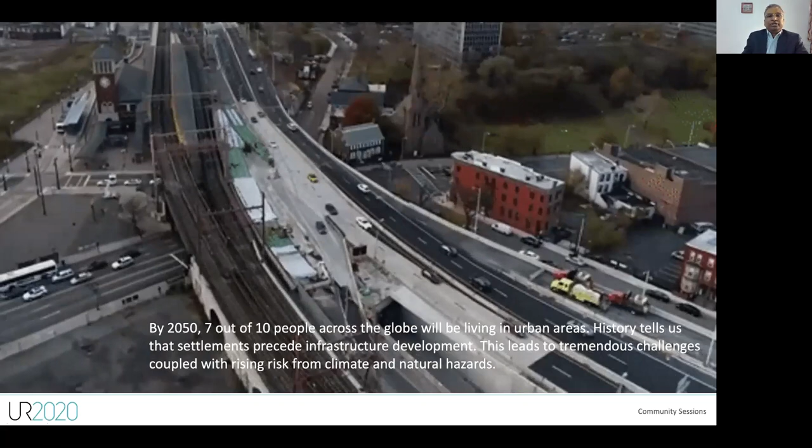So let's start the session with a small background as to what the session is going to be covering, so that you have an understanding of what to expect from the session. While infrastructure is very important for both rural and urban areas, of late we have seen a lot of migration of people from the rural to the urban areas, to the extent that the projections say that by 2050, most of the world will be living in the urban areas. And we all have seen historically that settlements come first and the infrastructure follows the settlements.

So in that scenario, the development of the infrastructure is done in a constrained environment because of the settlements already being there. That induces several performance issues on the infrastructure. Now, these issues get exacerbated because of the additional impacts of the natural and climatic events. But in reality, durability and dependability should be the hallmark of the infrastructure. If the infrastructure goes down, it's not just the investment needed to bring it back online, but there is a lot of indirect impact that is associated with the infrastructure.

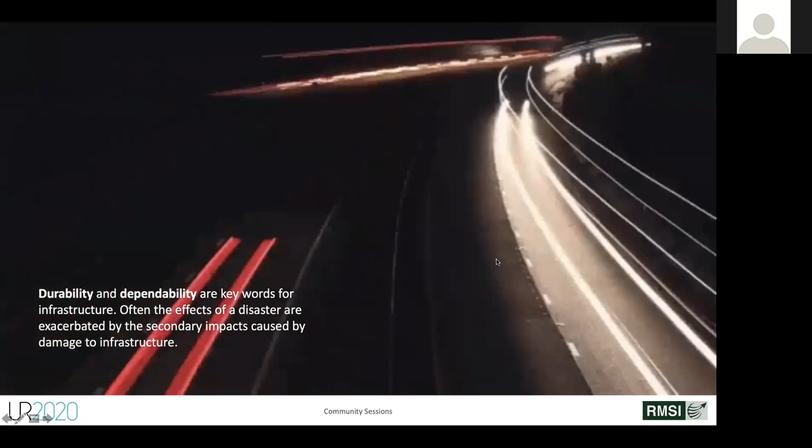So today, next slide. Yeah. So today we have a distinguished panel which is going to be discussing and will try to arrive at pathways for laying down an actionable framework for climate and disaster resilient infrastructure development. I will take you to a little bit more deep down assessment of why it is important to have our infrastructure disaster resilient. And then we will talk to Dr. Sushil Gupta and Ms. Alpa Sheth about the vulnerability aspects of the infrastructure.

And finally, we will get into the crux of this session, where we will discuss the pathways to disaster resilient infrastructure with our panelists, Dr. Ali Maher from CAIT, Mr. Sandeep Poundrik from CDRI, and Mr. Jeffrey Uwema from Info Planning Group. So let's just start with the initial assessment in terms of why it's so important to have our infrastructure disaster resilient. Next slide.

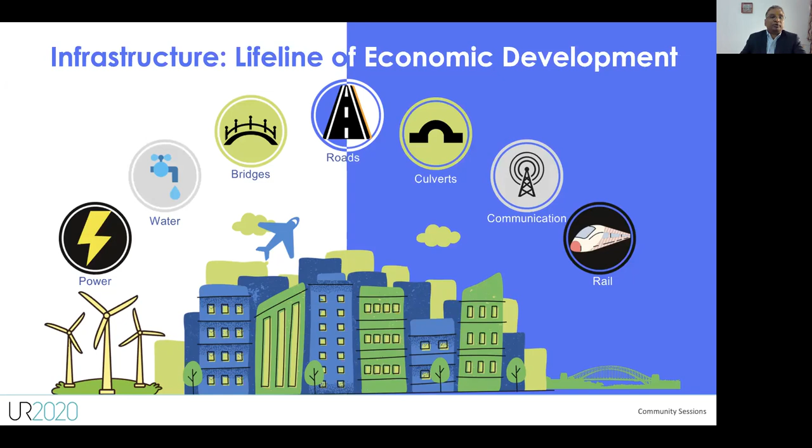So we all understand that infrastructure is the lifeline of our socio-economic development. Whatever production we are creating, the movement of goods to the market, our ability to export, and finally, the quality of life, all these parameters are riding on top of the infrastructure. Next slide.

But we have seen that infrastructure has been getting impacted every time there have been disasters. A few cases in example here are Hurricane Maria in Puerto Rico. It took about a year to restore power. Cyclone Sidr, Bangladesh, about 75 million people suddenly lost access to power. Hurricane Wilma, Florida, the grid restoration took 16,000 workers working for weeks at a cost of 1.3 billion. So we can see the kind of impact in terms of the direct losses that accrue because of the infrastructure going offline. So next slide.

But direct losses are not the only thing. The indirect losses surpass the direct losses when it comes to infrastructure, because we lose our supply chains, we lose connectivity. Both of these result in strong business disruption, and there is an additional impact in terms of increase in shelter and food needs, because even though the houses may or may not have been damaged, if the important utilities like potable water or electric power are missing, then we need to move people to shelter, because it may not be possible for people to live without both these.

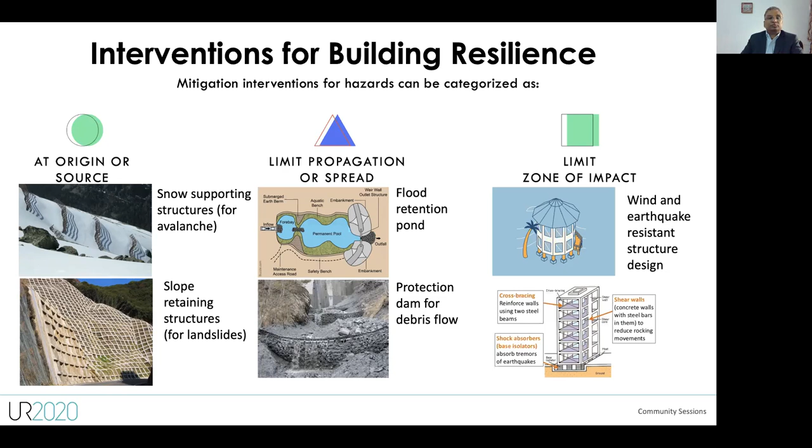But this risk to resilience process is not very straightforward. There are lots of challenges and gaps associated to that. The first and the foremost thing is that we don't really know where all our infrastructure elements are, as pinpointed locations on the surface of Earth, along with all the important characteristics. And that leads to risk assessments which are not really very accurate in terms of giving us an idea of what might really happen. Similarly, the focus on the vulnerability assessment so far has been more on buildings, because we were trying to save lives. So the focus was on residential structures, schools, hospitals. So infrastructure from a vulnerability perspective has kind of lagged behind a little bit.

But it is also complicated because it's not just the function of the structure, but also a function of how well it has been maintained. One of the reasons probably why infrastructure vulnerability is lagging behind is the unavailability of historical loss data for infrastructure from various events that have happened in the past. So all these things are basically directing us that the infrastructure risk is very important, but it's not an easy path to follow. There are lots of gaps that we need to fill, and there are lots of challenges. So we move forward to a discussion with our panelists to understand what their thoughts are about these gaps and challenges, and what their suggestions are for filling them. Next slide.

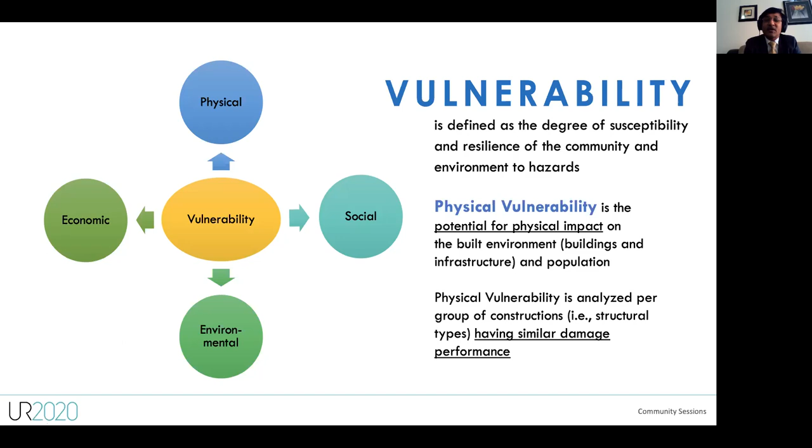Rimjim, next slide, please. Okay, vulnerability we can define as the degree of susceptibility and resilience of the community and environment to hazards. Vulnerability could be of different types. It could be social vulnerability, where it impacts livelihood. It could be environmental vulnerability. It could be economic, or it could be physical vulnerability. Here my focus is on physical vulnerability of infrastructure. Physical vulnerability can be defined as the potential for physical impact on the built environment: building, infrastructure and population. It can be analyzed per group of constructions, for example, structural types which have similar damage performances. Next.

Vulnerability modeling is usually done using vulnerability indices, discrete vulnerability and continuous vulnerability curves. Indices are mostly used for social vulnerability or environmental vulnerability, where we don't consider the relationship between the hazard intensity and the damage. For physical vulnerability of infrastructure or important structures, we go with the development of damage functions or vulnerability functions. Vulnerability functions can be developed using analytical or engineering studies. We can use historical loss data if it is available, or the third approach is expert judgment or heuristic approach. These could also be validated or improved through a combination of these three. Next.

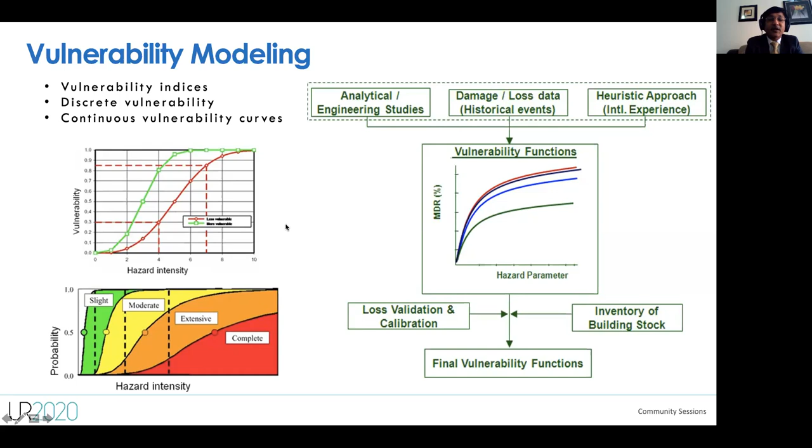Let me take the example of cyclone Fani in India. This was a category 4 tropical cyclone, and this was the biggest cyclone after the Odisha super cyclone of 1999 and 2014. Cyclone Fani caused almost 89 fatalities, and the total loss was more than $8 billion. The total power infrastructure damage alone, if I see only the power infrastructure, was more than USD 1.2 billion.

It impacted 5 districts of Odisha state alone, and another 9 districts were extensively damaged. About 4 million people across the state were without power for almost 40 days. So if you see the infrastructure damage just for the power sector, for transmission lines and towers of 33 kV it was of the order of 82%, for 11 kV it was 73%, 53% of substations were down, and 415 V distribution lines and towers were about 46%.

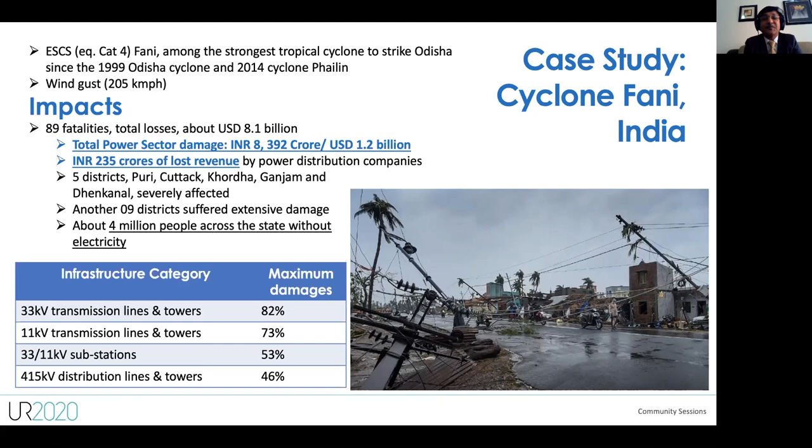Next. If you see the photographs before and after, you can see on the top right the electric tower. You can see it has gone into the water. Same way with the communication towers, you can see that the damage was quite extensive. Next.

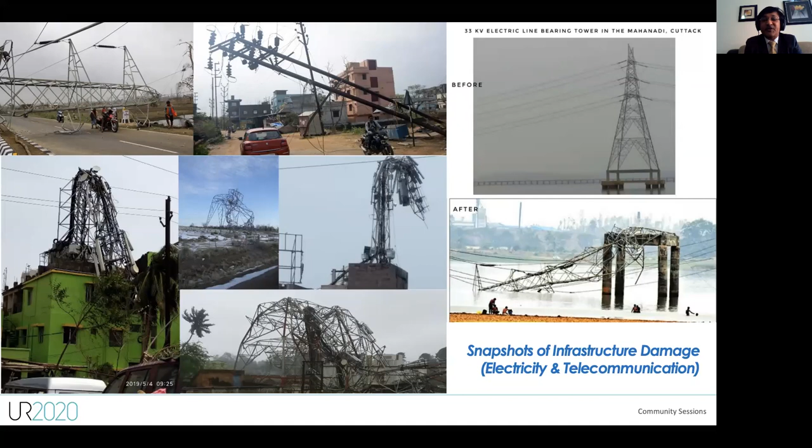What are the vulnerability factors? The first factor that comes to my mind is the design of this infrastructure. This infrastructure has been designed over a period of time, where we used old codes and guides. So that's the first and weakest vulnerability factor. Second is the material of construction. With age, material also gets weakened. Aging infrastructure, maintenance issues, then corrosion because of saline water. The whole state is along the sea, so there is a lot of saline water. Then damage to foundations, such as from waterlogging. Next.

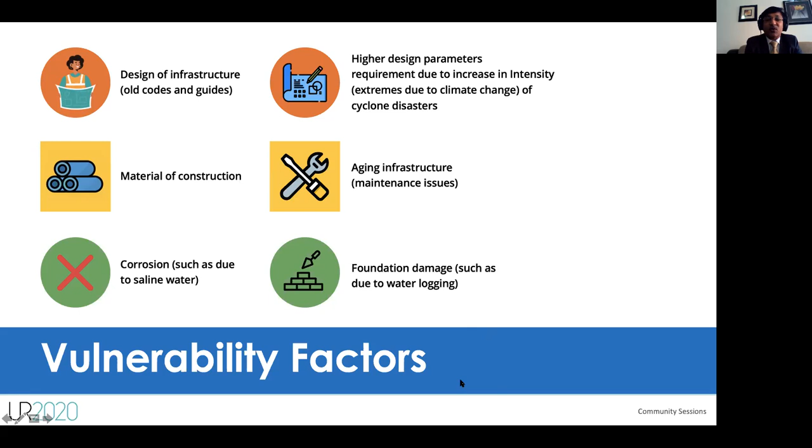What are the challenges? Challenges are the large network size, and component-level understanding of structural and non-structural attributes is a big task. And then asset management, maintenance, periodic inspection and condition monitoring, as well as redundancy. Build redundancy in the network so that if one substation fails, we can island only that portion, and the rest can stay on power. Next.

So Sheila's already painted a broad brush picture of the vulnerabilities. So without further ado, let me move from the general to the specific. And as Pushpendra has said, I'm going to focus on a particular area of vulnerability in our infrastructure, that is bridges. Next slide, please. Let's see it through the prism of three parameters: data, asset management, and redundancy.

For a country with one of the finest information technology industries in the world, we can surely do better with the quality of our data, its collection and cataloging, its authenticity, the review protocol, and its accessibility. Next slide. Let me share the story of bridge data in India versus elsewhere in the world. Say the US of A.

Every 4 years, the American Society of Civil Engineers produces a report card for America's infrastructure that rates the condition and performance of American infrastructure, assigning letter grades based on the physical condition and needed investments for improvement. The committee assesses all relevant data and reports, consults with technical and industry experts, and assigns these grades. It has certain criteria it uses, such as capacity, condition, future need, operation and maintenance, public safety, resilience, and so on.

In India, back in 1996, the Roads Ministry commissioned a study for a bridge management system. Software was procured. The system, essentially a database software to be operated by engineers who had to be hired and trained, would assemble data based on numerous parameters. But the system failed. Why? Because the key piece was missing: trained engineers. Also missing was a department who took ownership of the project. Cut to 20 years later.

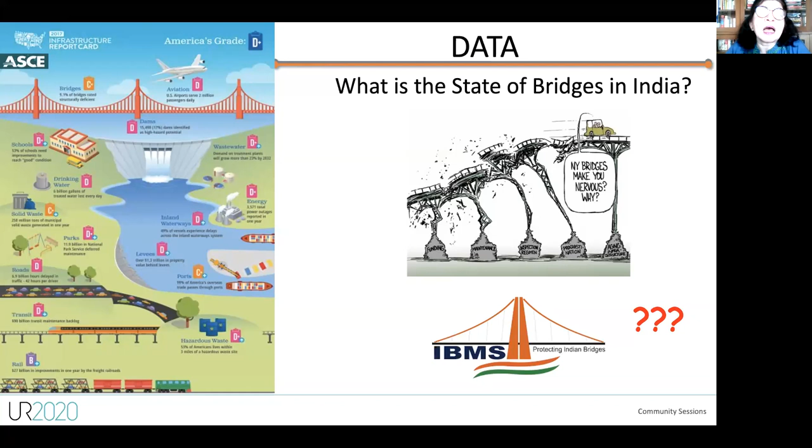Asset management goes hand in hand with a good database. A thorough bridge inspection program helps to ensure small problems never become large ones. A team of bridge inspectors from the public and private sector, qualified on all relevant competence criteria, need to be trained to examine every component of a bridge to determine its physical condition. They need to be skilled in seeking the root causes of the deterioration and the strain which has been caused in the bridge. They need to recommend necessary corrective actions, and they need to evaluate alternative repair rehabilitation methods that meet the specific needs of the bridge and the community. We do need to have this in place.

Unfortunately, in the present situation in India, bridge maintenance authorities do not have sufficient budgetary support to undertake large volumes of distress management. The tendency is to develop specifications for cosmetic rectification of visible symptoms rather than to rectify and address the root cause of the defects. This leads to allowing the bridge to deteriorate further till a time when it can be declared critical and recommended for replacement. For example, during the 5 years of implementation of the IBMS, no major rehabilitation program was initiated.

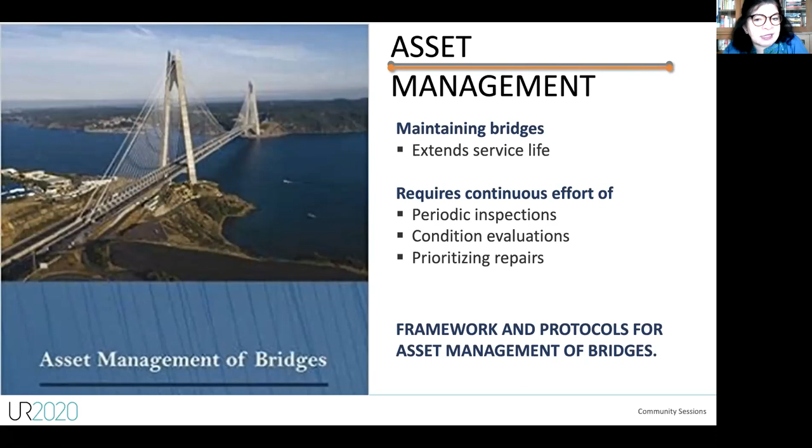Next slide. The last parameter, redundancy, which I'm going to talk about. There are many other parameters, of course. There are many areas in the country where a town or region is connected to mainland through just one bridge or one mountain road. Collapse of that pathway isolates the region. If the area is of significance, multiple paths of access need to be ensured. Alternately, if that is not possible, then the development planning of that region should reflect the inherent vulnerabilities and discourage further growth.

We all remember what happened in the case of the Surajbari Bridge, the lone connector of Kutch to the rest of India in the 2001 Bhuj earthquake. The old bridge was already badly deteriorated and experienced horizontal displacement of as much as 1.5 meters. It was therefore not competent to carry any load. The new bridge was also significantly damaged. And besides, it was not fully ready. The approach embankments were still to be constructed.

Now, this situation caused huge impediments for rescue and relief in the first crucial week after the quake. Emergency repairs and balance construction were carried out on a war footing to make the new bridge functional.

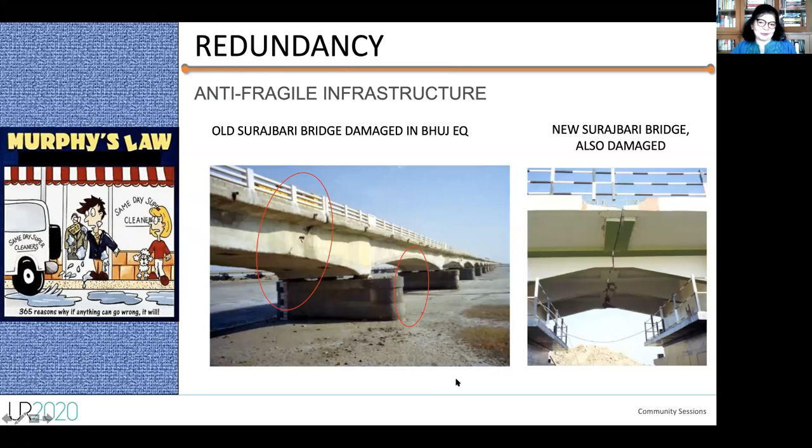All right. Thanks, Alpa, for your insights into the bridges. And a quick question. You know, we are a little behind the schedule. I would just like you to take a few seconds to put your thoughts on what the way forward would be, considering where we are.

So I think, at least for bridges, the steps for the short term is just resuscitate the IBMS in a different avatar. In the medium term, I would say they need to train engineers and create a cadre of competent bridge engineers and bridge inspectors. And in the long term, I would say we need to do the prioritization and triaging of the bridges and setting up a criteria for the same, and actually having a plan to retrofit 5% of the compromised bridges annually. It's pretty much the way the US of A does it.

Thank you. Yeah, all right. Thank you very much, Alpa. This has been a lot of interesting information that you have shared, and very, very relevant and very prudent. Thank you very much. We move forward to our next panel, which is basically getting into the crux of this session, which is the pathways to resilience.

We'll start with Dr. Ali Maher, who is a director at the CAIT and a professor of civil and environmental engineering at Rutgers. He has been leading CAIT as a Tier 1 University Transportation Center, spearheading research through innovative technologies. So, Ali, we would like to understand from you the state of infrastructure resilience in the US with a specific focus on transportation, because that is your core area. Ali.

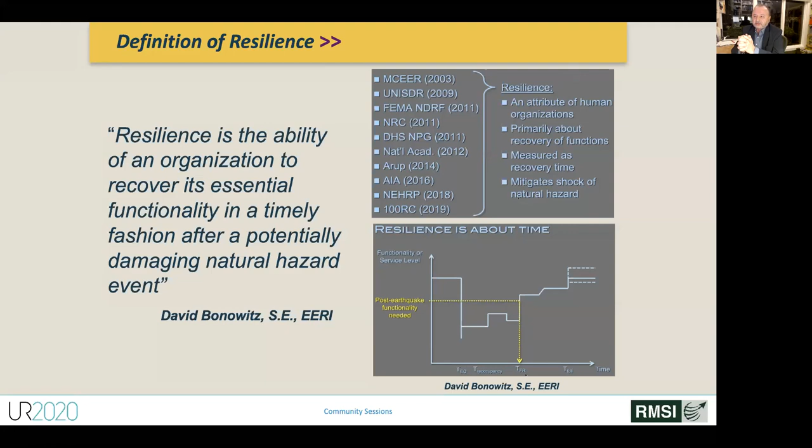With respect to the transportation sector and assets, the goals are pretty much similar. If you can go to the next slide. The objective here is essentially to increase or sharpen the slope of recovery after big events, and that's pretty much the same overview and concept. Next slide please.

In the US, as with many other countries around the world, and I've been hearing your discussions here today, pretty much the same issues. The intensity and frequency of hurricanes, floods, droughts, heat waves, and more intense wildfires are quite alarming. In 2018 and 2019, we had more than $136 billion in monetary damage alone, aside from loss of life and other more critical damage, from weather disasters. And this follows 2017, which was the year with the highest damage ever, with 16 weather events and a total damage of 306 billion. Next slide, please.

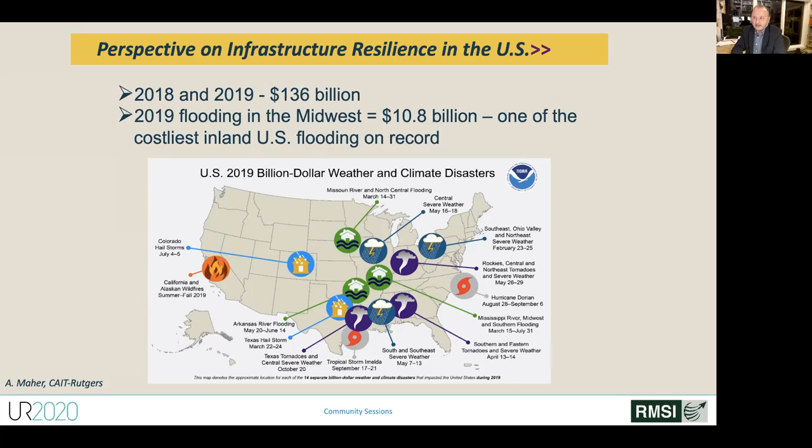So as a result of all these events, and even before that, a view is emerging among our transportation agencies, asset owners, planners and engineers that when we account for resilience, infrastructure design must include interdependencies, as Pushpendra alluded to earlier. The cascading effects are critical, and we should consider resilience a function of an ecosystem, essentially, of tightly interconnected and interdependent physical, cyber, and human components.

That adds to the non-linearity and the complexity of the problem in doing vulnerability assessment, risk analysis, and ultimately, as Dr. Gupta mentioned, benefit cost analysis, which will be critical. What we are also observing here is that extreme climate change is posing a serious threat to the transportation system, interrupting essential services to people, communities, and so on.

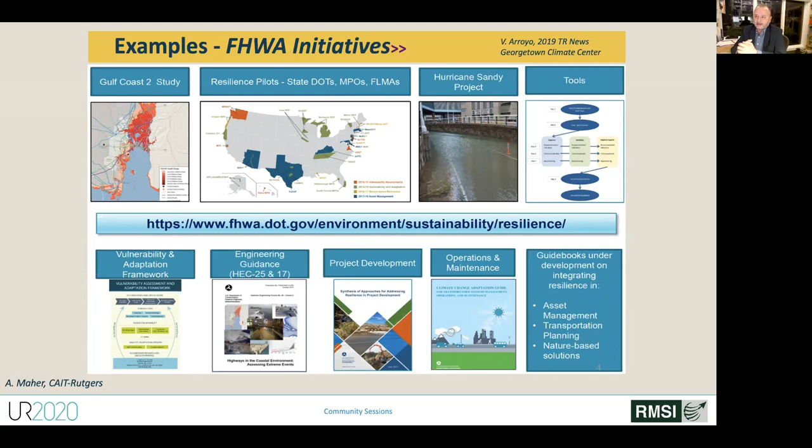The previous two speakers talked about the vulnerability assessment, and that is part of what Federal Highway Administration in the US and US Department of Transportation did quite a bit of work on and came up with this new guideline. It is called Vulnerability Assessment and Adaptation Framework, which I highly recommend, if you don't have access to it, to look at. It's free for download from the internet. It was developed in 2018, and it provides an in-depth structured process for conducting vulnerability assessment, particularly for transportation assets. In addition, a number of tools and interfaces have been developed in the last 2 years. Please go to the next slide.

One tool which is of importance to us, that many of the states are beginning to use, and we have been using also on the academic side in helping our industry partners, is called RAMCAP. It's a methodology that is basically an all-hazard risk and resilience management process for critical infrastructure.

So these tools are out there, they are available. Next slide. Some of the current research that my team in our center is engaged in, which also cuts across various assets, includes utilizing advanced data collection methods to collect multidimensional data sets to produce a coherent view of disaster impacts, utilizing advanced condition assessment, non-destructive testing, and structural health monitoring of transportation infrastructure assets.

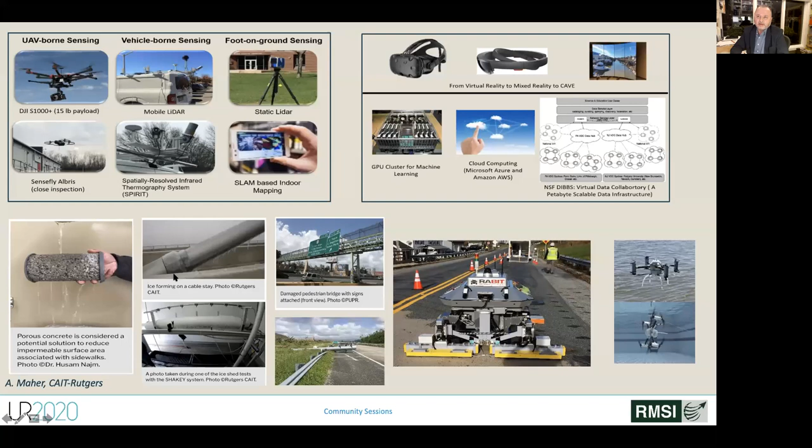So I'll stop here. There are some summaries and takeaways, some lessons learned, which I would respond to during the question and answer period. Thank you. I think I will just wait for the discussions to go over some of these slides.

So thanks a lot, Ali, for your insights and enlightening us with the state of affairs with transportation resilience in the US. An immediate question that comes to my mind is, with all that is happening, with so many initiatives being taken and under implementation, what is your take on the transportation infrastructure, the way it stands in the US today? How will it perform if another big event happens?

Very good question. So I would say two critical developments stand out. The first one is the mandate that the federal government is putting on each state to integrate resiliency into their asset management protocols. And this is actually not being done uniformly. Some states are way ahead of others. And folks are working on developing uniform standards and protocols. This work is ongoing. There is, however, a consensus that resiliency needs to be included at all levels of planning, design, and implementation. And the important thing here is that since government is mandating this, any project that requires federal dollars has to incorporate resiliency into its design, planning, and implementation.

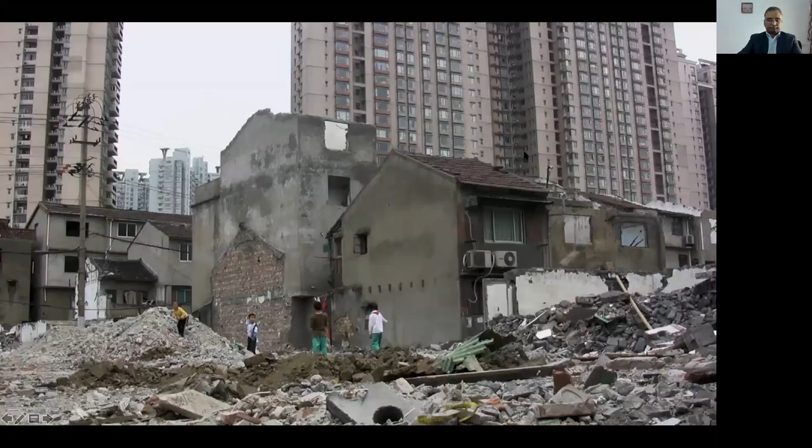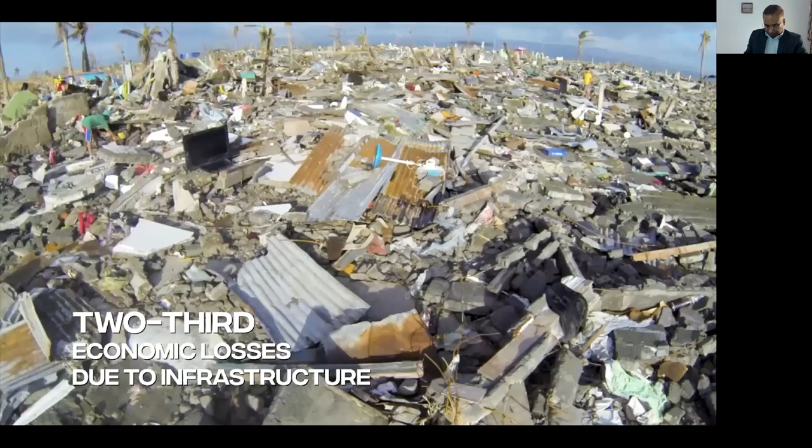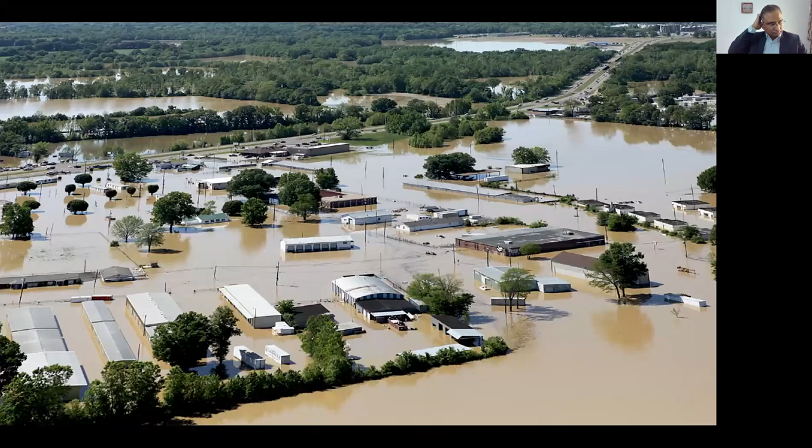Resilient infrastructure is critical for people's well-being, quality of life, and economic prospects, irrespective of where they live. Inadequate and poorly built infrastructure blocks economic and social development. Increasing exposure to earthquakes, floods, and tropical cyclones stresses infrastructure systems. 2/3 of total economic losses in disasters are associated with infrastructure damage. As extreme weather events become more frequent and intense due to climate change, these losses are set to rise. The impact on small island developing nations and least developed countries is particularly severe. Disaster and climate resilient infrastructure is essential to the achievement of the sustainable development and to accelerate climate action.

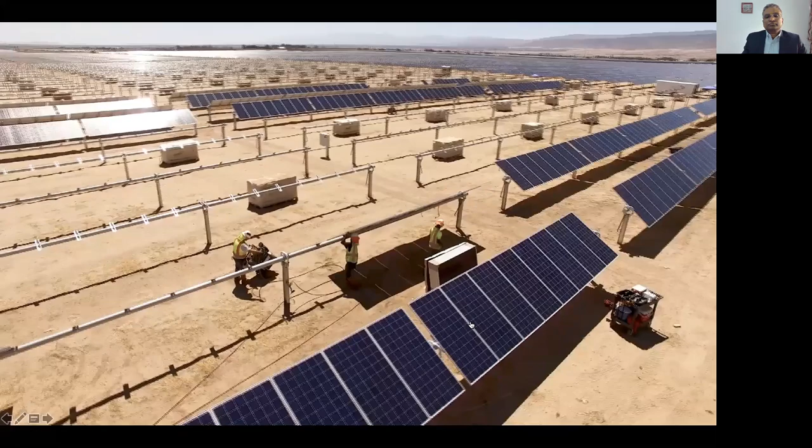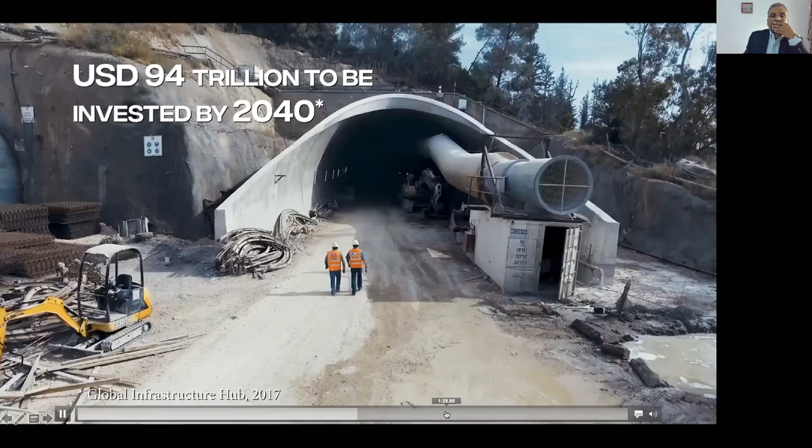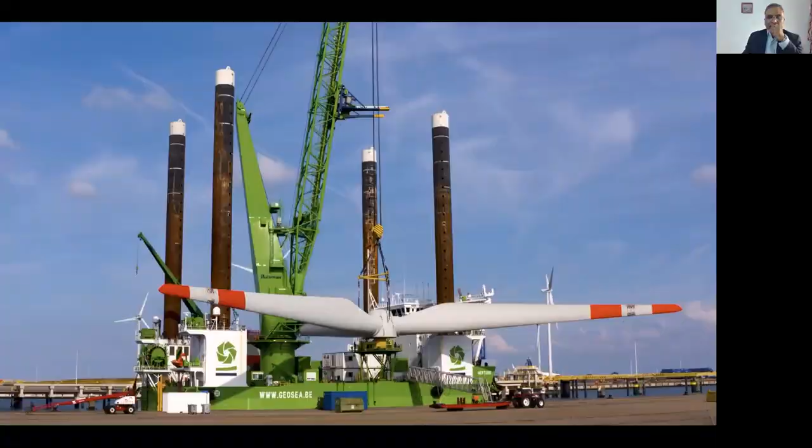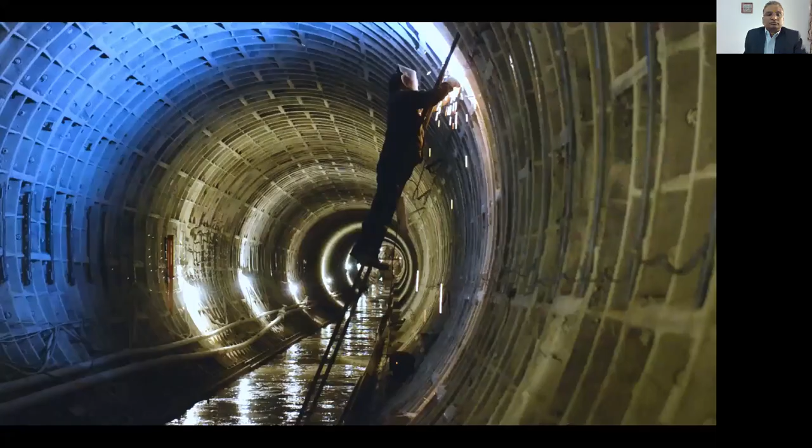$94 trillion global investment is needed to fill the infrastructure deficit by 2040. More infrastructure will be built in the next 20 years than in the last 200 years. Fortunately, achieving disaster and climate resilient infrastructure is not expensive. $1 invested in strengthened resilience generates $4 in avoided economic and social losses. The Coalition for Disaster Resilient Infrastructure is an international partnership that will support countries to build the disaster and climate resilient infrastructure they need. Championed by global leaders, CDRI will provide knowledge, technical support, and capacity development to those countries with the greatest infrastructure challenges. Join us to achieve the SDGs and accelerate climate action by making all new infrastructure disaster and climate resilient.

Thanks, Rimjim, for playing the video. Now we move on to Mr. Pondrik, and let's try to understand from him CDRI as a nodal institution for infrastructure resilience. What are the plans? How do you plan to bring that change?

So thank you, Pushpendra, and thank you for giving this opportunity to CDRI, and good morning, good afternoon, and good evening to everyone. Let me start by saying that today is the International Day for persons with disability. And in this context, the importance of resilience of infrastructure becomes even more important because we have to make this infrastructure not only resilient, but resilient with inclusiveness for everyone, including people with disability. So with that, I will start the presentation.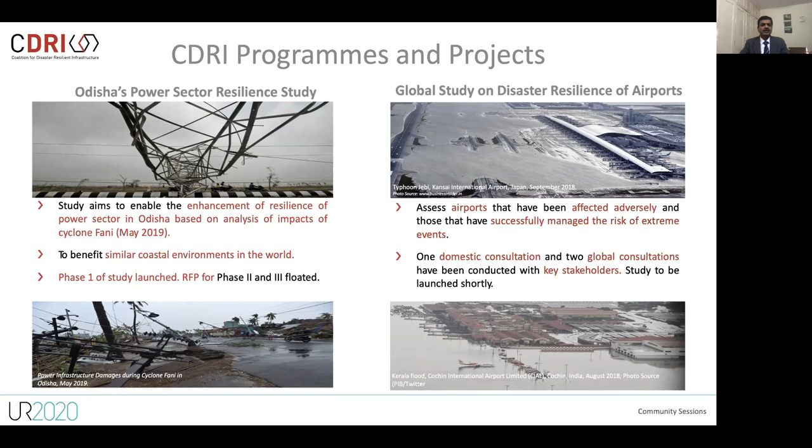CDRI will be working on airports also, and we will be conducting risk and resilience assessments. So Dr. Alpa Sheth mentioned the resilience assessment. So CDRI, with coordination and collaboration of member countries, will be conducting resilience assessments in key infrastructure areas, and some of that work has already started. CDRI will come with a biennial flagship report on the disaster resilience status of the infrastructure in the world. This is a very ambitious project, and the work has started in collaboration with UNDP on this. We expect the first report to be out in 2022. Next, please.

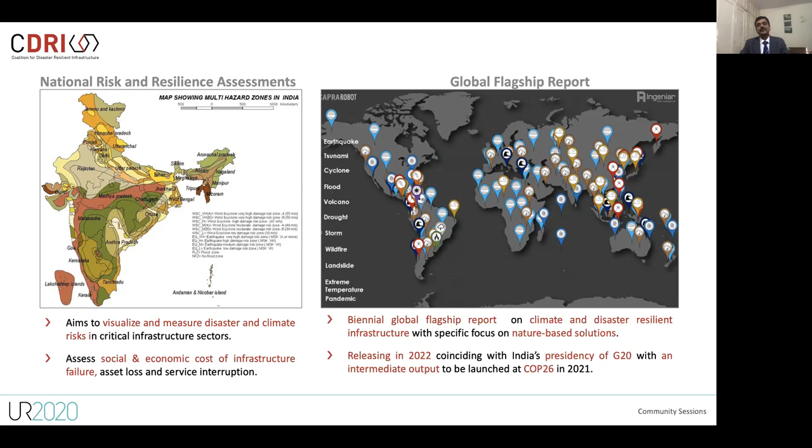CDRI has also started a fellowship program in which fellowships up to US $10,000 will be given to researchers who will work on resilient infrastructure issues, who will do research, and this fellowship program was launched in September. The last date is in January, and we are expecting that researchers from all over the world from member countries will apply for these fellowships.

Next, please. The International Conference on Disaster Resilient Infrastructure has been scheduled in March. This is the third such event being organized by CDRI. And the major theme of this conference is that we will talk about disaster resilience, including nature-based solutions. And we have already started events in the run-up to this conference. Next, please.

As I mentioned, in the three themes CDRI is working in, we will be working on recovery and reconstruction, on disaster finance, capacity development, standards is a major area, and governance and policy. Next, please.